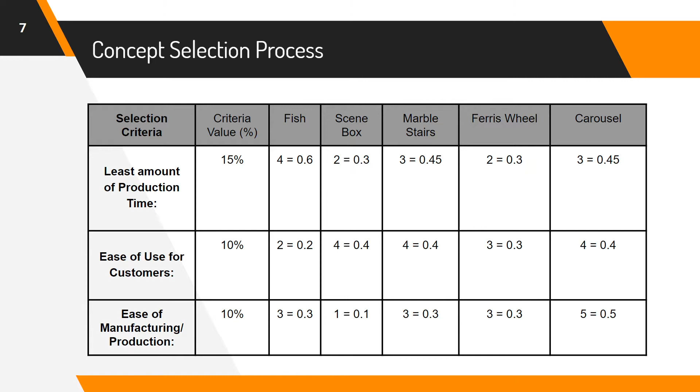So as we said, we're going to be looking at the different designs we selected from. First one was a magnetic fish. It's a customizable fish that was attracted to a magnetic fishing rod. Each of the parts of the fish had a magnetic end that allows it to rotate. Children can learn about attractions and poles as they assemble.

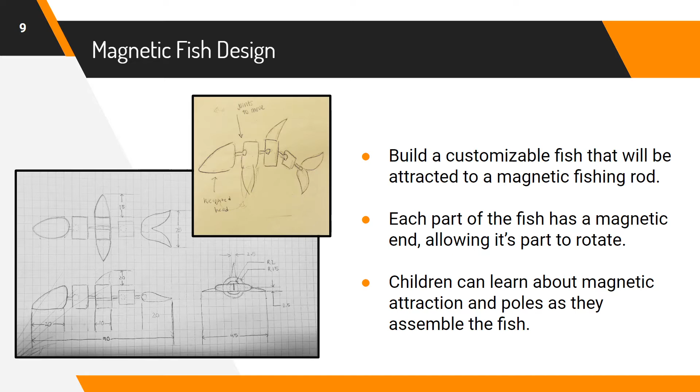The next design is a scene box. It's a pre-built toy that lets you play the scene over and over again. It has pieces that can be swapped with other sets, and it's one of 3 collectible sets.

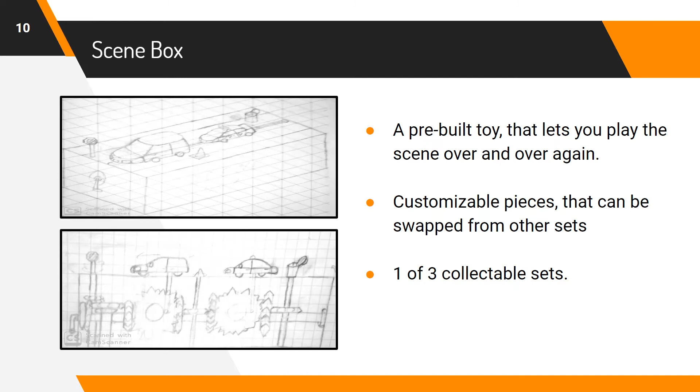Our third idea was marble stairs, where we have never-ending stairs, so the fun never ends. It's a very simple design and easy to manufacture, as it only consists of one material, and it can be built with more stairs or extended to any size.

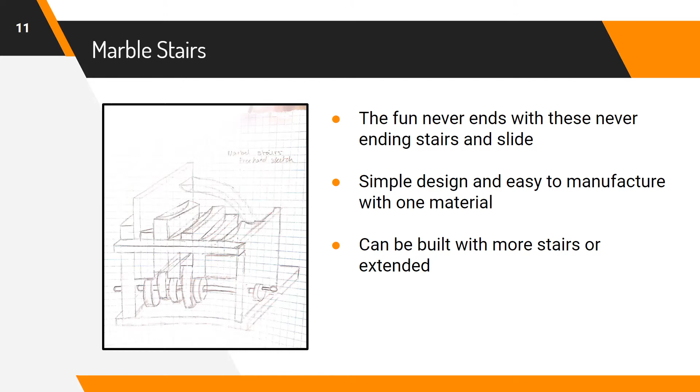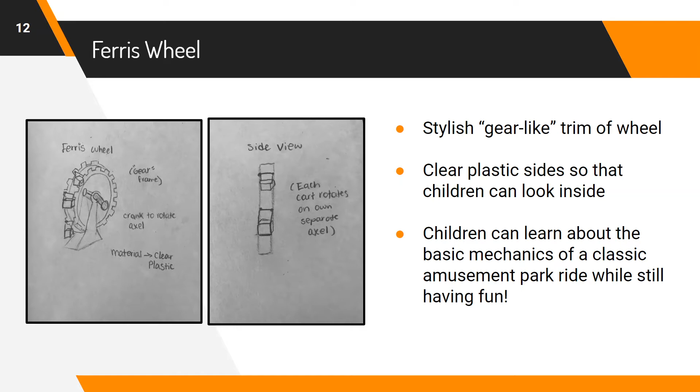For our next concept, we decided on looking at a Ferris wheel, which would feature a stylish gear-like trim to the wheel to support our whole STEM theme. There would be a crank that would rotate the axle, and each cart rotates on its own separate axle. Children are able to look inside due to the clear plastic sides, and this will allow them to learn about the basic mechanics of a classic ride that they may like going on at the fair, while still having fun.

Our final choice was the carousel, which educates children regarding the gears involved in turning it, and again continues that never-ending fun for everyone. It could be bright and boldly colored for marketing, and influences the STEM brand to children as they learn the building process of putting a carousel together. It's a very simple design that can incorporate other designs such as a music box.

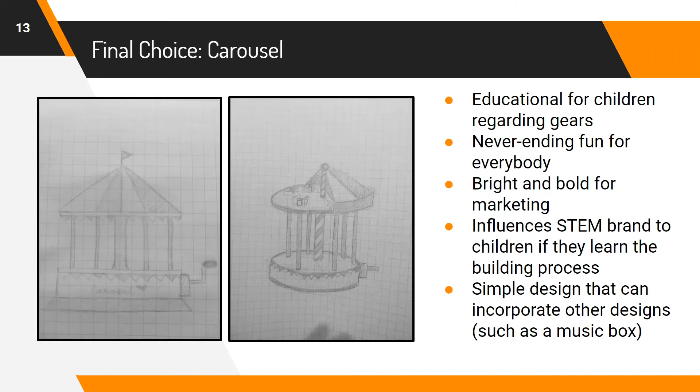This is the base 3D model made in SolidWorks. As you can see in the first picture, it is created with the spokes going down into the base where the gears are held.

In the second picture, where it is cut in half, you can see a plate in between the gear and the base of the carousel, which moves each spoke up and down, creating a cohesive up and down movement as the gear rotates. The last picture shows a more detailed look at the inside workings of this carousel.

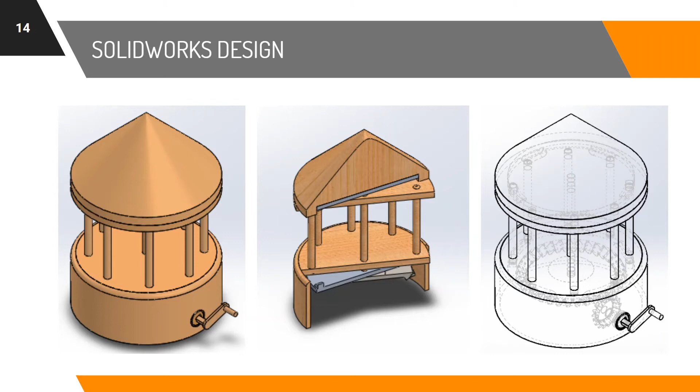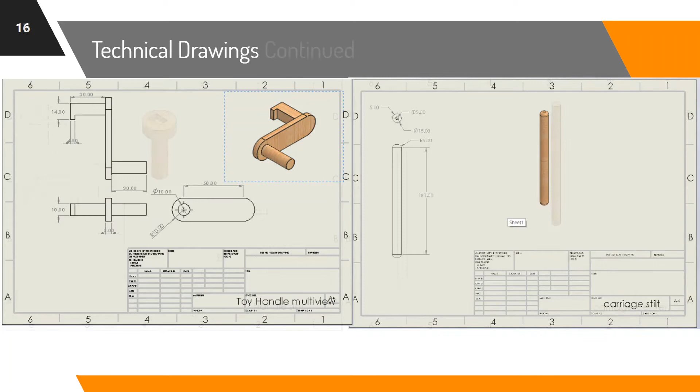Now we'll be looking at the general monitoring process. The first meeting was February 6th, an initial meeting where we set up forms of communication, assigned tasks, and discussed how we were going to create the design. The next meeting was March 9th, where we viewed each of the designs and came up with the final decision of the carousel, and assigned project roles in terms of the report and SolidWorks.

The next meeting after that was March 23rd. This one was about more of the details, such as discussing the dimensions of the SolidWorks file and finalizing details about the company, such as mission statements, final wording, and our name. The final meeting on March 25th was just finalizing details on our presentation and ensuring all the information was accurate and up to date.

As we were finalizing the materials we would need and everything needed in the setup, we had to establish what the cost of each material would be.

For the main structure of the carousel itself, we were thinking of wood because it is both durable and has a long shelf life. We were thinking about 5 cubic meters would be enough.

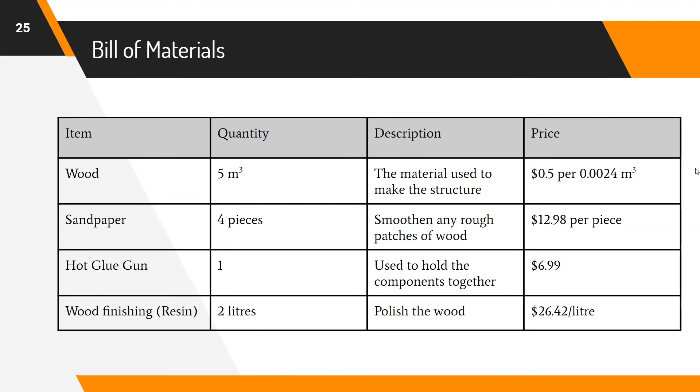Sandpaper would be used to smoothen out any rough patches of the wood that we would find; we get 4 pieces for about $12.98 per piece. We would need a hot glue gun to hold all the spokes and other components together, which goes for about $6.99. And in order to polish up the final product, we would use a resin-based wood finishing, about 2 liters of it, that go for $26.42 a liter.

After making our SolidWorks model, some potential changes we could make to our prototype are making it with cheaper material, targeting a wider demographic by finding an alternative to hot glue, and adding more functions. Future projects inspired by this design will encourage children to design a toy given some guidelines and overall create a greater depth of understanding in the STEM fields.

Out of our 5 different ideas, namely magnetic fish, scene box, marble stairs, Ferris wheel, and carousel, we have chosen carousel as our final design concept. It does not have a very complex design, making it easy to manufacture, and has the ability to join different structures, for example, a music box.

We believe that our final design is a brilliant and striking idea for marketing. Our final design stands tall on our objective, that is, to make fun and creative toys that motivate children to investigate their interest in STEM.